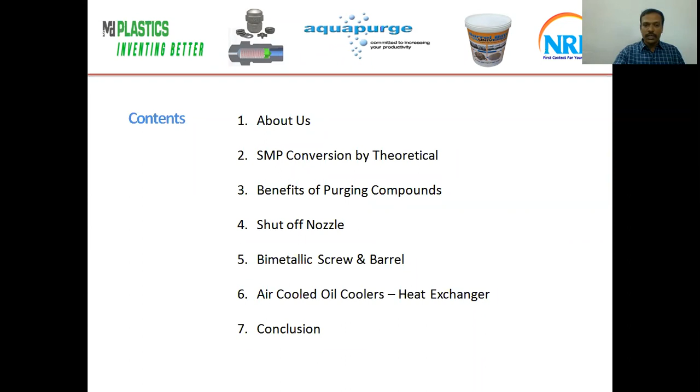I'm going to brief about cost saving by increasing equipment efficiency and reducing the cost of produce through enhancement of production via process optimization. I'll cover the contents like SMP conversion by theoretical, benefits of purging compound, shut off nozzle, bimetallic screw and barrel, air cooled oil coolers, and conclusions.

Aquapurge, Karthik, your screen is not shared. Go to your share screen. Share. Okay, screen, sir. No, now it is okay. Screen is not coming. Oh yeah, let me. The screen is shared because I am. Yes sir, it's shared. Yes sir, visible. Yeah, then proceed.

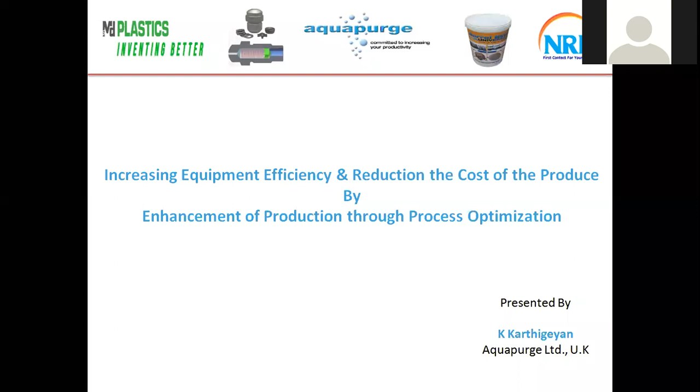Via export-led sales drive, Aquapurge has more than 750 customers worldwide, and now is introduced into India for enhancement of business. NRH Industrial and Auto Machineries is the distributor of Aquapurge in India, located at Chennai, Tamil Nadu.

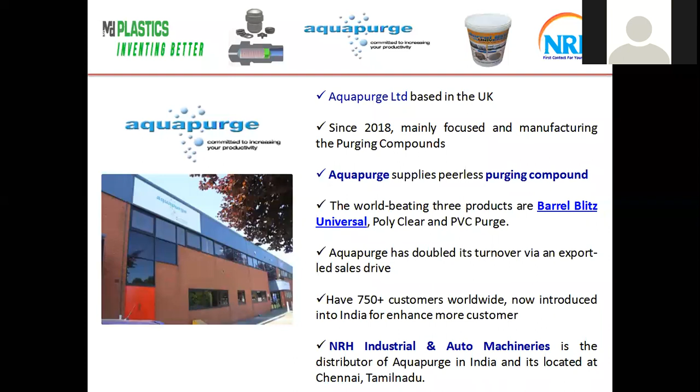By implementing SMP conversion in the plastic industry, it helps save cost. What is SMP? SMP means standard molding parameters. Any kind of plastic part before production, a trial has to be conducted and the process optimized and validated. Once the process is optimized and validated during trial, the parameters are recorded. The recorded parameters are normally called standard molding parameters.

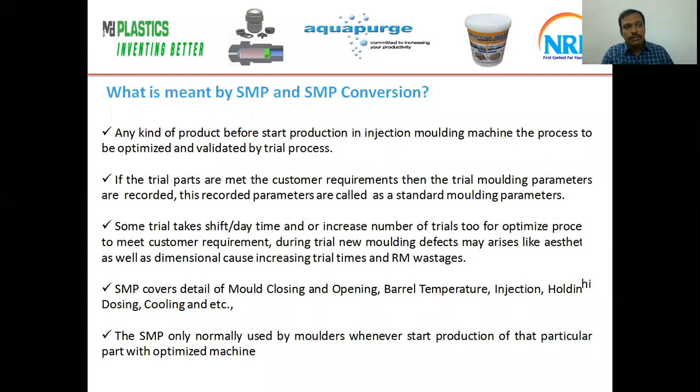Normally the trials take a shift or daytime, and sometimes the number of trials also increases to meet customer desired quality. SMP covers details of mold closing, opening, barrel temperature, injection, holding and dosing, cooling, etc. parameters. The SMP is normally used by molders whenever they start production on the injection molding machines.

SMP conversion means any product which is previously molded in an injection molding machine meeting customer requirements, the particular SMP can be converted to our desired machine theoretically to save trial time, raw material wastage, and also cost of the produce.

For example, the beaker part running in a 100-ton machine has an SMP available. Now we plan to take a trial in a 150-ton machine for future production. So the 100-ton machine SMP we can convert theoretically to match the 150-ton machine. This SMP converted parameter we can use as the basic parameters before starting the trials.

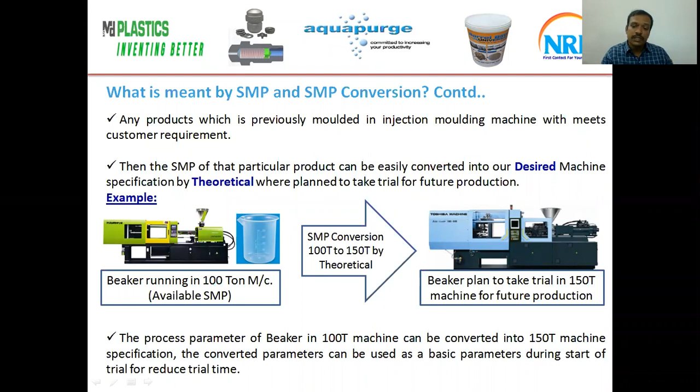Why is it important? These techniques increase the success rate of trial while meeting customer requirements. Whether this part can be molded in that particular machine or not, we can find out before the trial. We can save trial time, reduce material wastage, and also prevent molding defects.

Especially, sometimes the parts are filled using a sequence gate to avoid weld lines. Without conversion, the weld line may shift to some other place. By using conversion, in the same area we can follow the weld line sinks and short fills, enabling easy startup and process fine tuning.

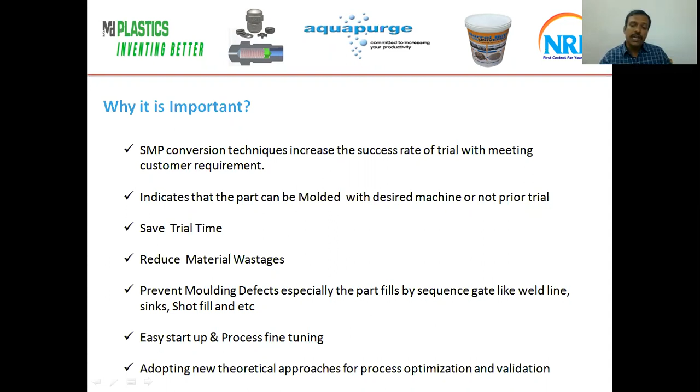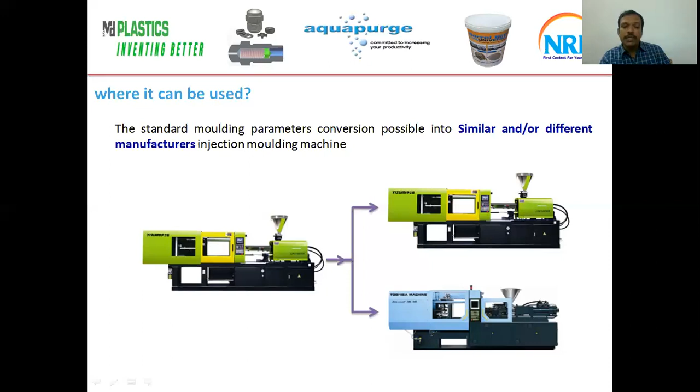This SMP conversion also helps adopt new theoretical approaches for process optimization and validation in the injection molding process. Where can it be used? This process conversion can be used on similar injection molding machines and different make injection molding machines. If I have a 100-ton Usumi machine, and have planned to load in a Toshiba 150, the process can be converted from Usumi to Toshiba, or Toshiba to Usumi.

When can it be used? Sometimes the machine may get a breakdown, and at that time we want to produce this particular part, then we want to take a trial. This SMP conversion helps in that situation.

This SMP conversion helps to load this particular mold in other machines with an easy fine-tuning process. It also serves as a contingency plan for plastic industries.

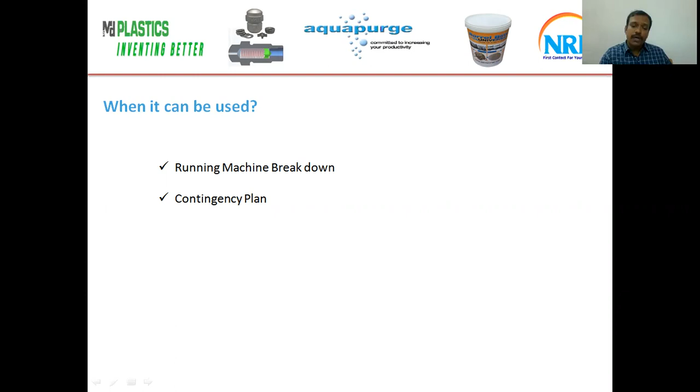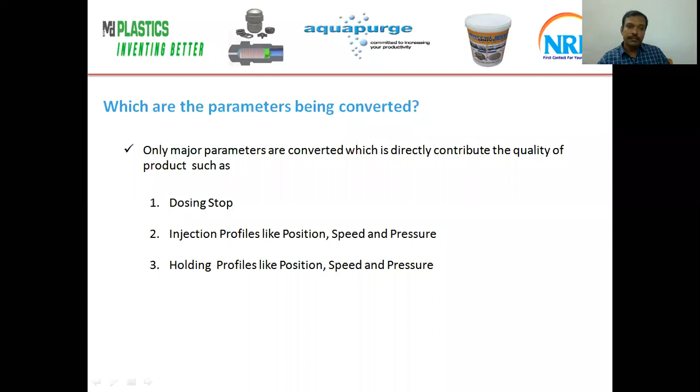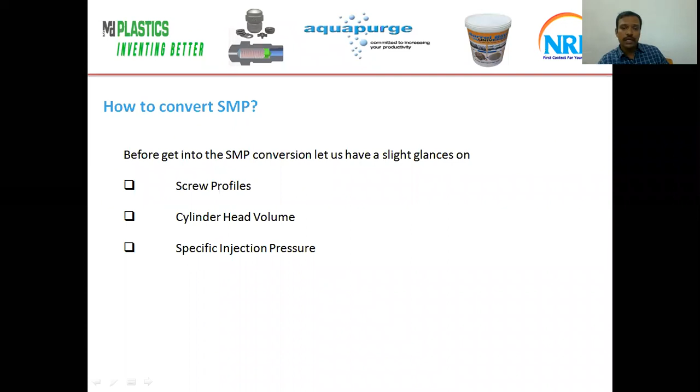So how to convert SMP? Before we get into the SMP conversion, let me give some glance on screw profiles, cylinder head volumes, and specific injection pressures. In industry, normally some molders carry out production in injection molding unknowingly of the screw profile details in the injection molding machine.

Normally, knowing the screw profile before trial or production in injection molding helps molders improve process consistency and makes it easy to troubleshoot molding defects such as discoloration, black spots, and degradation on molding.

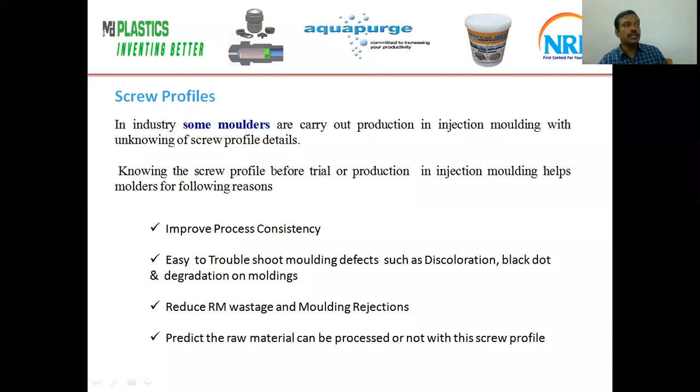If you mold raw material with master batch using a standard profile screw, it normally causes discoloration. So you need a barrier screw instead. This reduces raw material wastage and molding rejection, and helps predict whether the raw material can be processed or not with the screw profile in the injection molding machine.

Here the schematic diagram shows the standard profile screw. Normally, a standard profile screw has a lower shear rate, while a barrier profile screw has multiple flights on the screw and a medium shear rate for processing plastic material.

It will support good mixing when molding raw material with the master batch. A mixing profile screw gives a higher shear rate of processing material, but it supports very good mixing of raw material with the master batch.

If you process raw material with master batch using a standard screw, it normally causes improper mixing since it's a standard profile screw, so discoloration issues may appear. So it is preferred and suggested to process with a barrier or mixing profile screw to prevent such discoloration molding issues.

If you process any engineering material with a mixing profile screw, it causes a higher shear rate, and the molding defect of burn marks may appear on the molded parts. So, screw profile also plays a vital role in injection molding machines for molding free from defects.

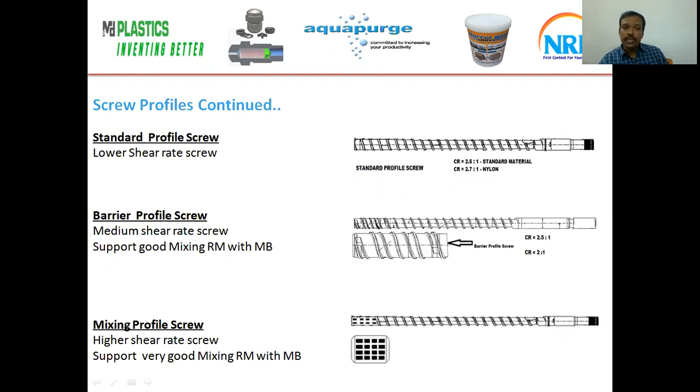Calculation of cylinder head volume: normally the maximum screw stroke in an injection molding machine would be 4 to 5 times the screw diameter. If the screw diameter is 50 mm, then the screw stroke might be 4 into 50 equals 200 mm, so 200 to 250 mm.

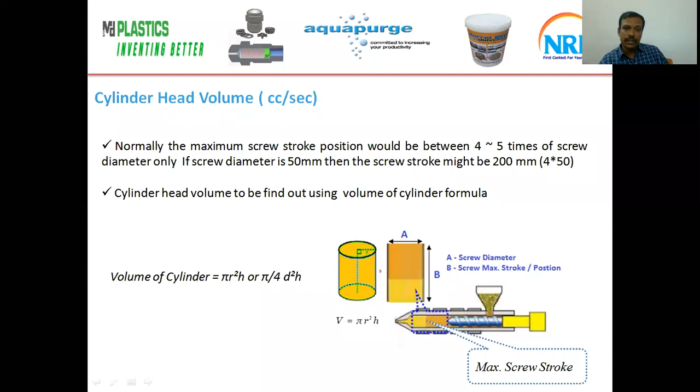Cylinder head volume can be found using the volume of cylinder formula, pi r square h or pi by 4 d square h. Let us assume the screw stroke is 4 times the screw diameter to calculate cylinder head volume: 4 into 50 equals 200 mm or 20 centimeters.

Second, we have to find the screw radius. Screw radius equals screw diameter by 2, so here screw diameter 50 by 2 equals 25 mm or 2.5 centimeters. After finding the screw stroke and radius, we can finally find the cylinder head volume.

So volume of cylinder equals pi r square h. Cylinder head volume equals 3.14 into 2.5 into 2.5 into 20. So for a 50 diameter screw, the cylinder head volume is almost 392.5 cubic centimeters.

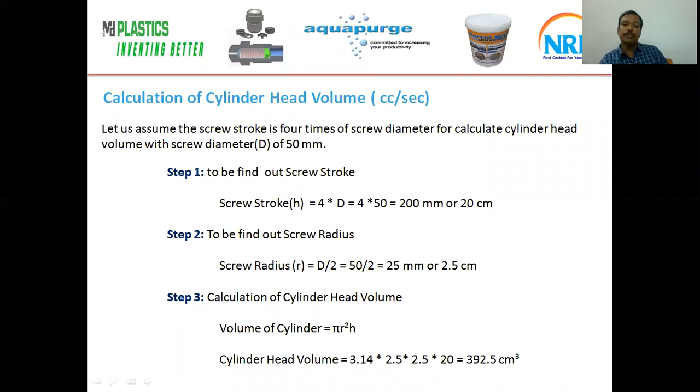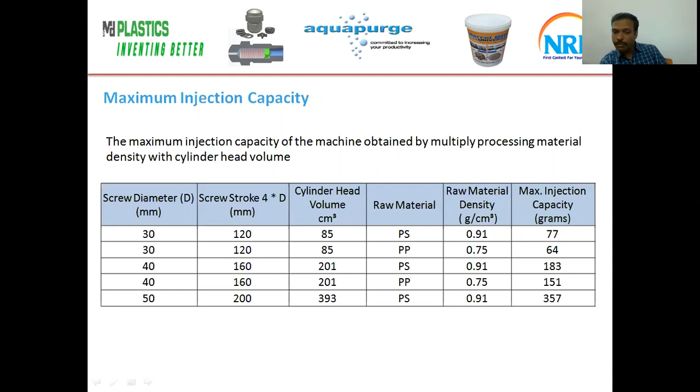Specific injection pressure.

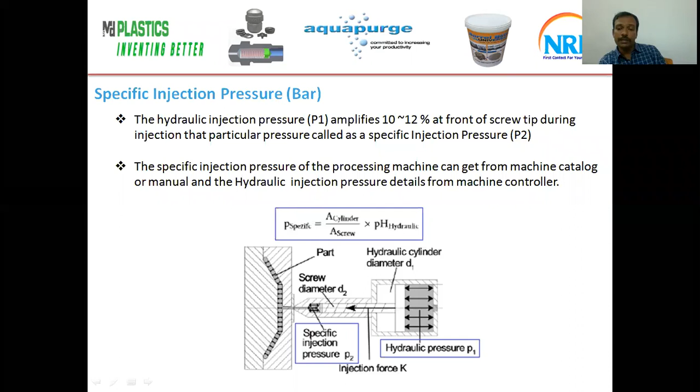Dosing stop position calculation. The dosing stop position is also found out by using the volume of cylinder formula. So dosing stop position equals shot weight divided by pi r square into 0.1 into density of material. Here that 0.1 refers to 1 mm stroke.

I have already run this beaker part in a 100 ton machine. The 100 ton machine has a screw diameter of 50 mm. So the dosing stop is 68 mm.

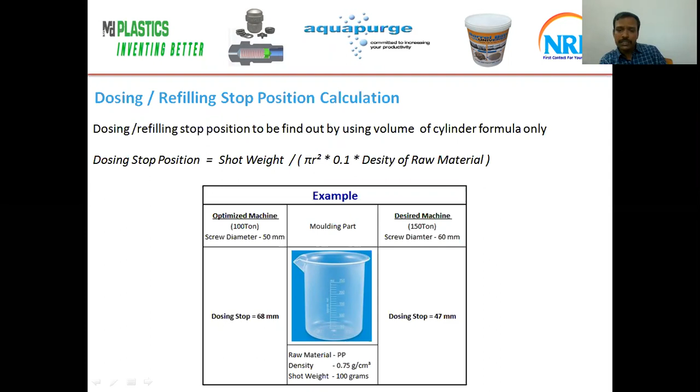Now I am planning to run this part into the 150 ton machine, which has a screw diameter of 60 mm. So by using this calculation, the dosing stop comes to 47 mm. So when screw diameter increases, the screw stroke might reduce.

Injection position and stroke profile conversions. The injection profile is converted using the same volume of cylinder formula like dosing stop. For the 100 ton machine, specific injection pressure is 2000 bar and hydraulic pressure is 190 bar. So in SMP we have that injection profile.

The positions are 70, 50, 18; speed 25, 80, 45; and pressure 100, 100, 100. Now I am going to convert this profile into the next desired machine of 150 ton. First I am going to convert the stroke positions.

Injection stage wise stroke is first converted into weight. First stage 20 mm injected, second stage 32 mm injected, third stage 8 mm injected. That 20 mm is converted into the weight such as 29.4, 47.1, 11.8, with the screw diameter of 50 mm.

Then the weight is converted into the position to suit screw diameter of 60 mm. Stage 1, 14 mm we have to inject; stage 2, 22 mm we have to inject; stage 3, 6 mm we have to inject.

Our screw dosing stop is already calculated, that is 47 mm. Then stage 1: 47 to 14 is 33 mm. So stage 1 we are injecting 14 mm. So stage 2: 33 to 22 is 11 mm we are injecting in the 60 dia screw. Then 11 to 6, 5 mm is the switchover position in the 150 ton machine.

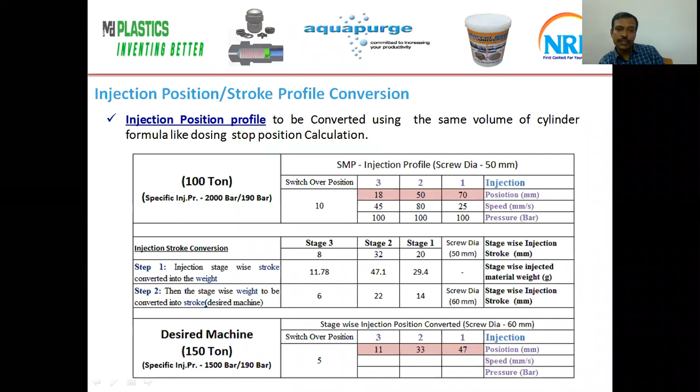So here's a question: what could be the injection rate if the injection speed is 50 mm with the screw diameter of 50 mm? First step, we have to find out the area of the screw. So the area of the screw for 50 mm dia is 19.625 centimeter square.

Step 2, we have to find out the injection rate. Injection rate equals injection speed by 10 mm - I am converting into centimeter, that's why I divided by 10. So 5 centimeter multiplied with the screw area of 19.625 centimeter square. So we obtain the injection rate of 98 cc per second.

So injection rate of 98.

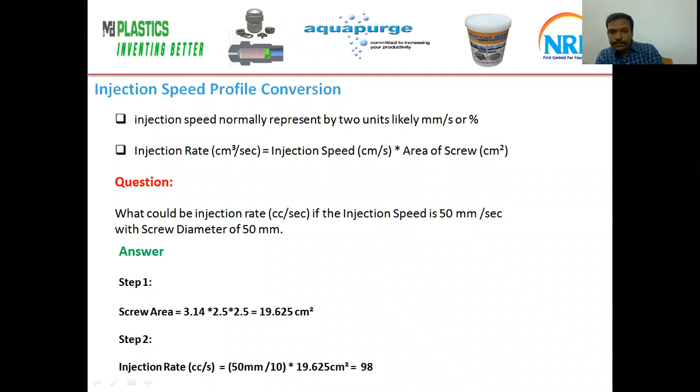Next, injection speed profile conversion. Now we know how to convert injection speed into injection rate. The same way we have to follow here. First step, the injection speed of the 100 ton machine is converted into the injection rate, such as first stage 49 cc per second.

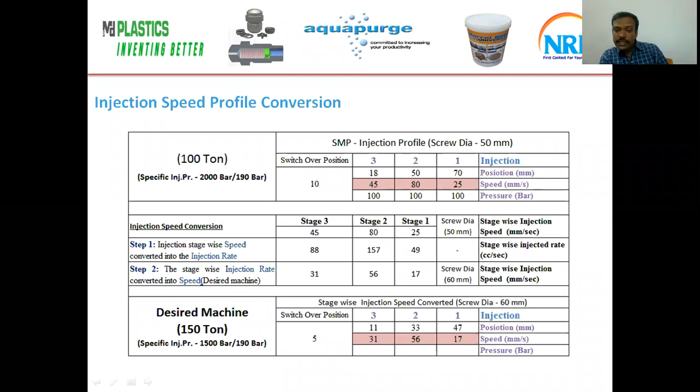Second stage, for 80 mm per second speed, it's 157 cc per second; third stage, 88 cc per second. Finally, the injection rate is converted back into the speed of the desired machine by using the screw diameter. So the speeds obtained are: first stage 17, second stage 56, third stage 31 mm per second.

Next, injection pressure conversions. We have to obtain the specific injection pressure and hydraulic pressure details from the catalog and the machine controllers. First step, hydraulic pressure is converted to the specific pressure. Second step, that specific injection pressure is converted into the hydraulic pressure of the desired machine.

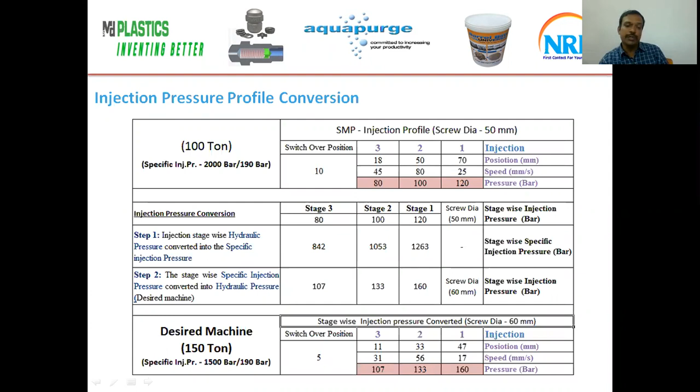So in the 50 dia machine, 120, 100, 80 is the injection pressure. For 60 dia, 160, 133, 107 is the injection pressure, because the 150 ton machine has a maximum specific injection pressure of 1500 bar. The holding pressure, speed and pressure profile conversion is the same as how we converted the injection pressure - the same method we have to follow here also.

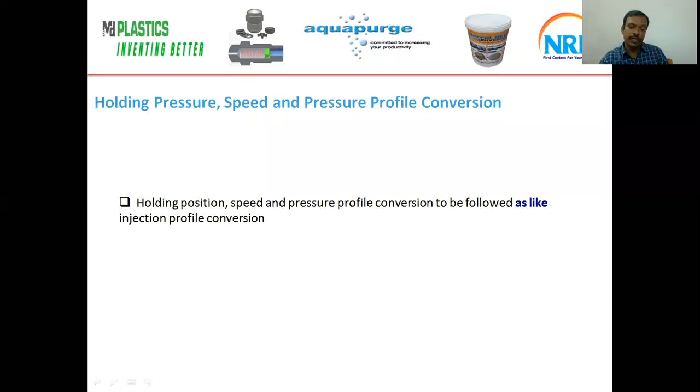After conversion, this process parameter requires some amount of process fine-tuning because of differences in screw diameter, screw profile, L/D ratio and compression ratio, changes in residence time due to screw diameter, wear and tear of screw and barrel, differences in nozzle orifice, and different manufacturers' injection molding machines.

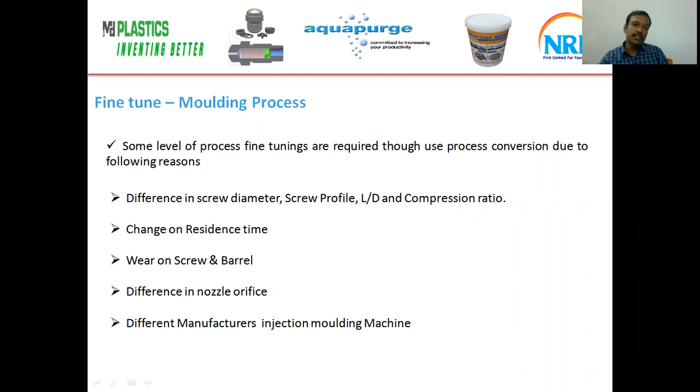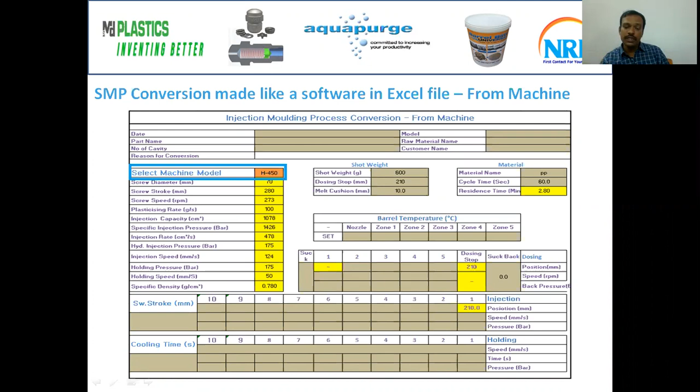In my previous company, I worked out a software in Excel file. Normally I select the machine, and automatically the specification comes out. So I feed the basic parameters, then select which machine I am going to take the trial on, and that process parameter is automatically converted into the two machines.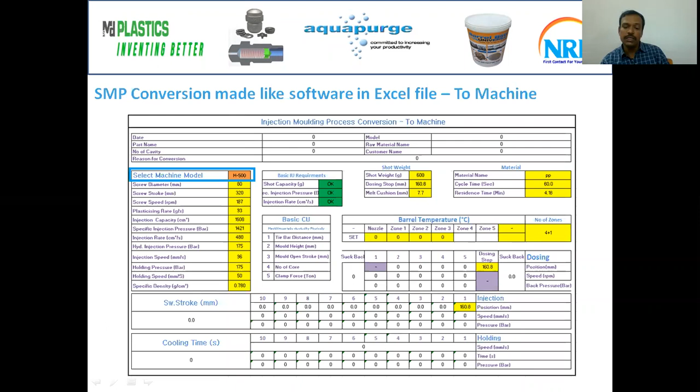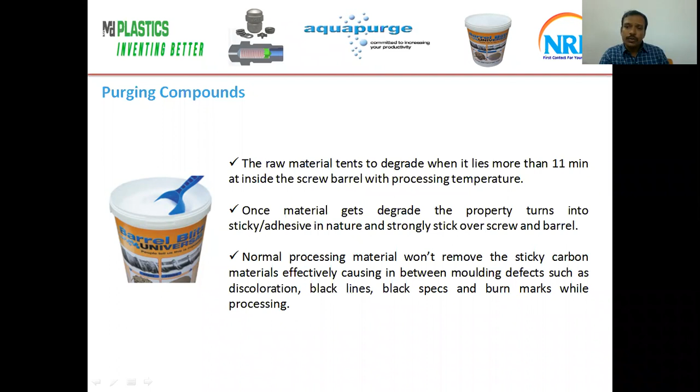Next, I am going to talk about the benefits of purging compound. Normally, any plastic material tends to degrade if it stays more than 11 minutes inside the screw barrel at processing temperature. Once material degrades, it becomes sticky or adhesive in nature. Once it sticks on the screw and barrel, it's very difficult to remove. Normal processing materials won't remove the carbon effectively, so it causes black dots or black lines during molding.

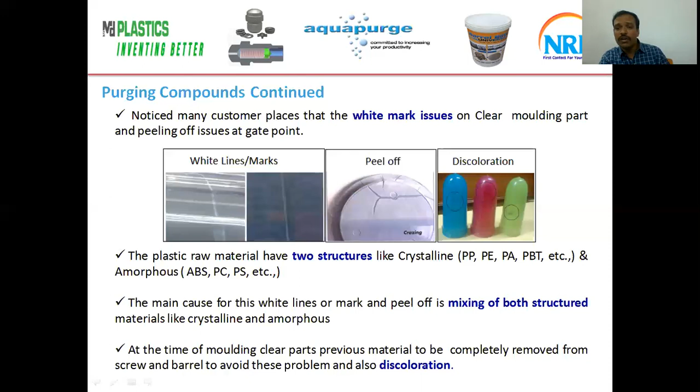At some customer places, I noticed white lines, peel off, and discoloration issues. These are caused by mixing of two structured materials, such as crystalline and amorphous. To eliminate these defects, we have to completely remove the last processing material. For example, if you change from PP to PC, PP is a crystalline structured material and PC is amorphous, so the crystalline material must be completely removed from the barrel and screw prior to starting PC molding. Otherwise, it will cause white lines, peel off, and similar issues.

So I'm going to introduce Barrel Blitz Universal. It works like a scrubber, removes sticky carbon material, and effectively cleans the last processing material from the screw and barrel. BBU enables rapid material and color changes too.

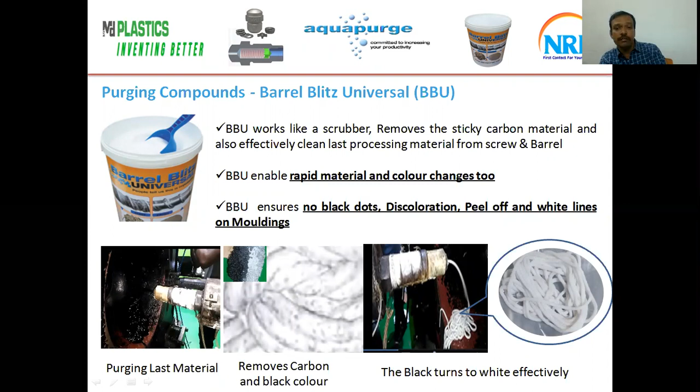BBU ensures no more black dots, discoloration, peel off, and white lines as molding defects. Here I've shown some photographs of purging the last material, removing carbon black material, and turning it to white effectively within 40 minutes.

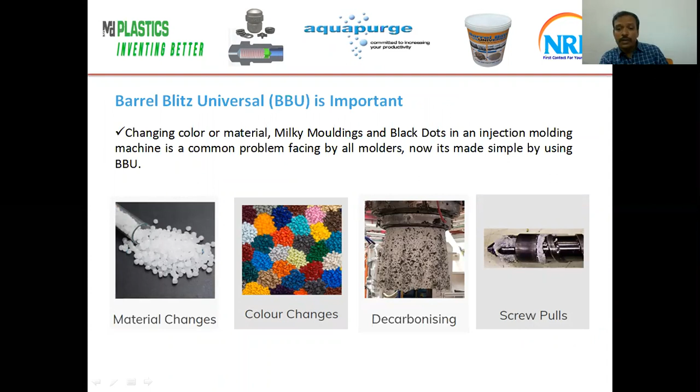The purging material can be used when changing material, changing color, decarbonizing, removing carbons from molding, and removing the screw from the barrel. Purging compounds like BBU can be used in injection molding, extrusion, and blow molding as well.

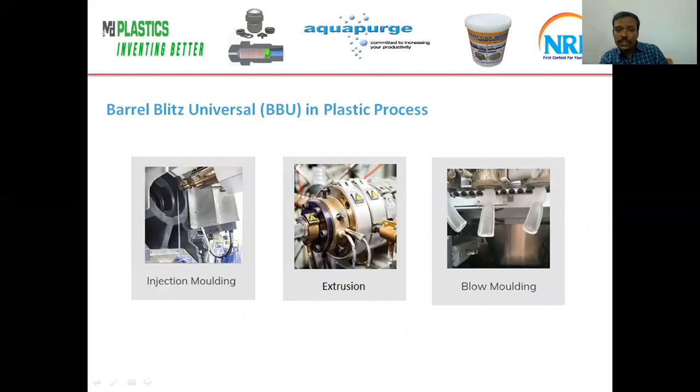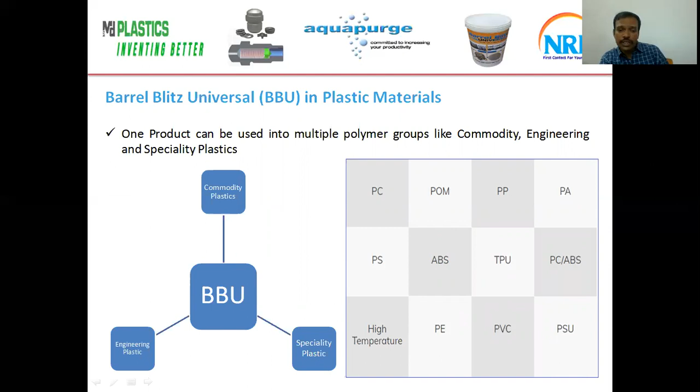Barrel Blitz is a universal grade that can be used with all commodity, engineering, and specialty plastic materials. It suits all kinds of applications and moldings, such as automotive, home appliances, textile, preforms, medical, packaging, PVC pipes, and household applications. Normally, customer requirements are quality, reliability, and lower processing cost.

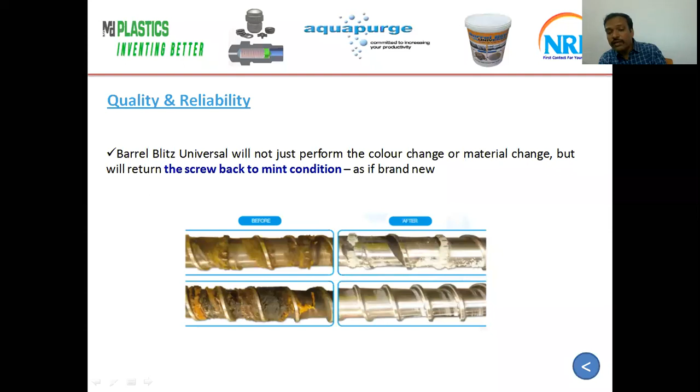Barrel Blitz doesn't just perform color or material changes—it turns the machine back to original conditions, as when we purchased the machine.

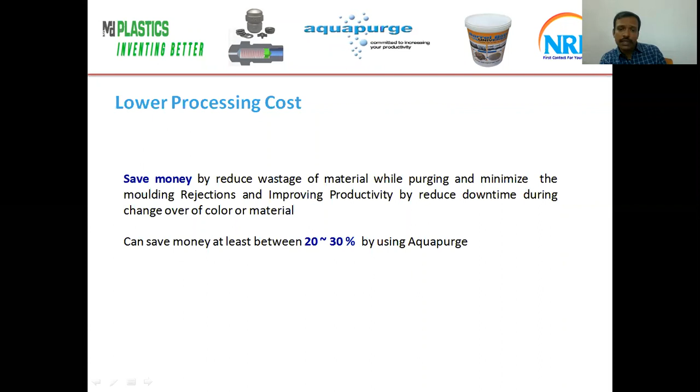By using purging compounds for color or material change, customers save money and improve productivity and profitability in the plastics industry. Normally it saves at least 20 to 30% of cost by using purging compounds.

Next, I am going to talk about shut-off nozzles. A common practice to avoid stringing and drooling in moldings is increasing suckback to prevent these issues.

But in scientific molding approaches, we should not use suckback for drooling or stringing because it will destabilize the molding and make the drooling and suckback process worse. So normally we have to use a shut-off nozzle to prevent stringing and drooling in moldings.

By using a shut-off nozzle, we can prevent streaks, voids, bubbles, and short fills in moldings. It also helps process consistency and repeatability.

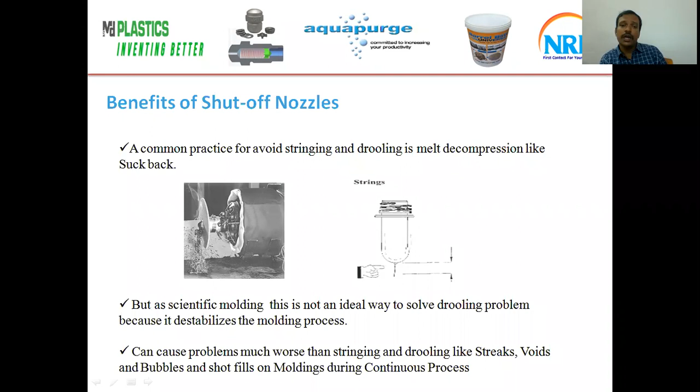So shutoff nozzles from MD Plastic USA. The shutoff nozzle tip is the simple and cost-effective solution to prevent drooling and stringing. It shuts off immediately as soon as the injection and holding process gets completed.

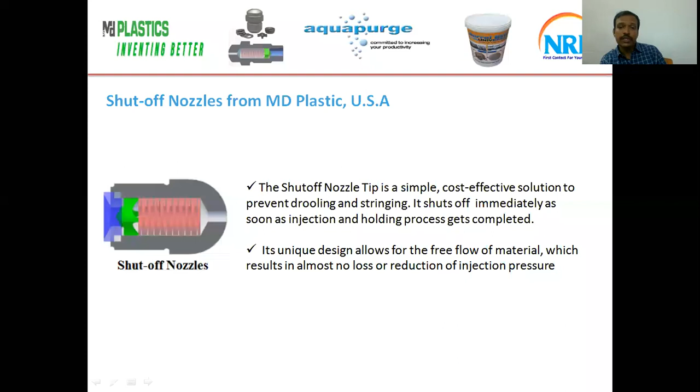Its unique design allows material to flow freely into the mold and also results in no loss or reduction of injection pressures. Features: reliable, easy to use, easy to install and remove, fits all nozzle bodies, used with all machine sizes, used with all polymers, and also easily available in stock.

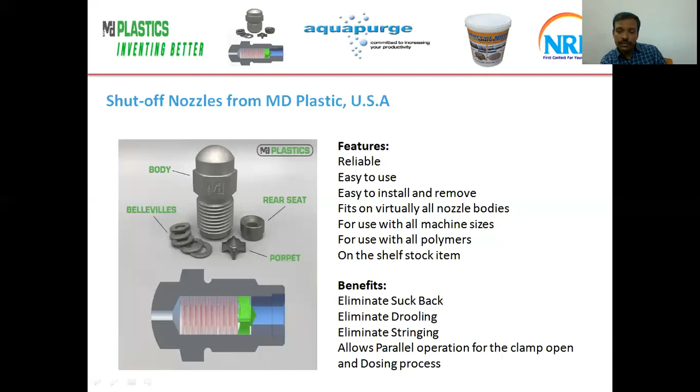So benefits for the shutoff nozzle: eliminates suckback parameters, eliminates drooling and stringing, sometimes allows parallel operation of mold open with the dosing process to reduce cycle times.

Next, I am going to talk about bimetallic screw barrel. Bimetallic screw barrel is made up of two metals. One is the base material such as nitro alloy, and one more is alloy liners like tungsten carbide.

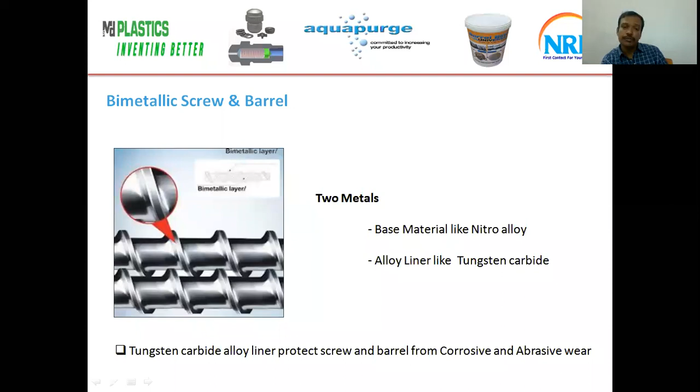When we process FR and glass-filled materials with a normal nitride screw, it causes abrasive and corrosive wear. So to prevent the screw and barrel from abrasive and corrosive wear, we have to use bimetallic screw and barrels.

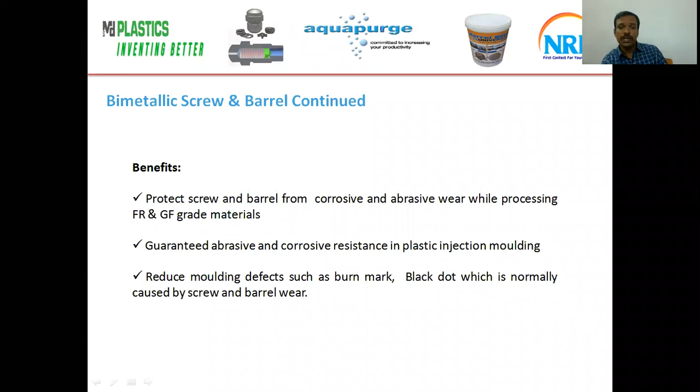By processing glass-filled and FR grade material with bimetallic screw barrel, we improve the life of the screw and barrels, and reduce molding defects such as burn marks and black dots, which are normally caused by screw and barrel wear.

Next, I am going to talk about air-cooled oil coolers. Normally, injection molding machines are powered and driven by power units. The hydraulic oil flows inside the cylinders and valves, which causes restriction of oil, increasing the oil temperature.

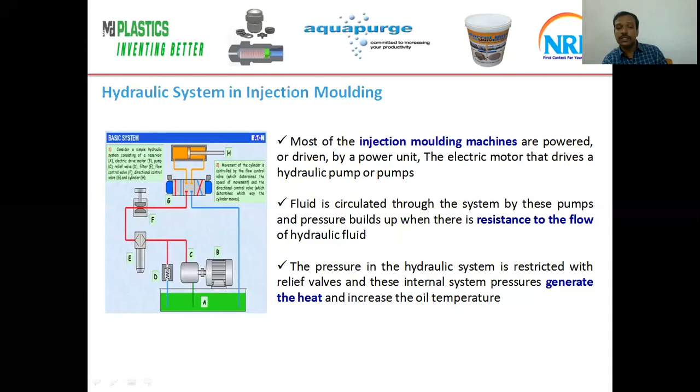When oil temperature increases, the viscosity of oil might change. When oil viscosity changes, it affects the system performance and also the elements of the system. Normally in the injection molding machine, we have to operate the oil temperature between 40 to 50 degrees. If it increases or decreases, the performance of the machine would change.

Normally in industry, heat exchangers are used for cooling the oil. From the restriction, the oil gets heated. That heated oil is cooled down through water circulation in the heat exchangers. Normally by using water, sometimes it causes scale formation in the heat exchanger, also affecting the performance of cooling the oil.

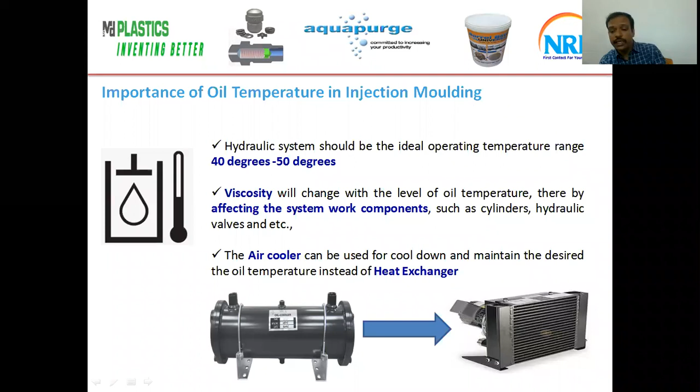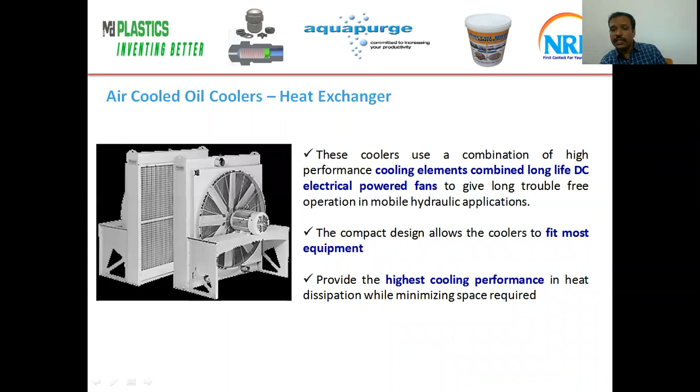Now, newly introduced are air coolers to cool down the oil temperature instead of heat exchangers. These coolers use a combination of high performance cooling elements combined with DC electric motors. They fit most equipment, use highest performance in heat dissipation while minimizing space required.

So air coolers are more suitable when water is scarce and contaminated. No water is required for cooling hydraulic oils, and this can save water too. No issue of scaling in the injection molding. It cuts down water circulation in the heat exchanger, and helps improve water pressure in main lines. It indirectly supports mold cooling for reduction of cycle times.

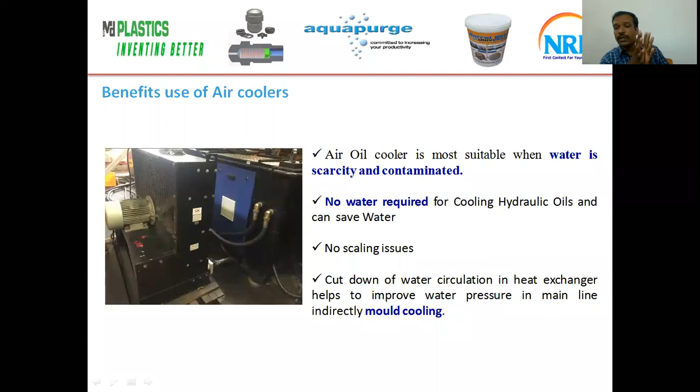Conclusion: SMP conversion can contribute to saving trial time and reducing raw material wastage during trials, to save cost of production. Aquapurge is the mechanical purging compound that provides deep clean of screw and barrel, enables rapid cleaning and color change, and effectively removes carbon.

Use shutoff nozzle to prevent drooling and stringing, and also stabilize the molding process for consistency. Bimetallic screw and barrel protects from abrasive and corrosive wear while processing FR and glass-filled materials. Air oil cooler is the most suitable cooling method for oil in injection molding machines instead of heat exchangers, when water is scarce and contaminated.

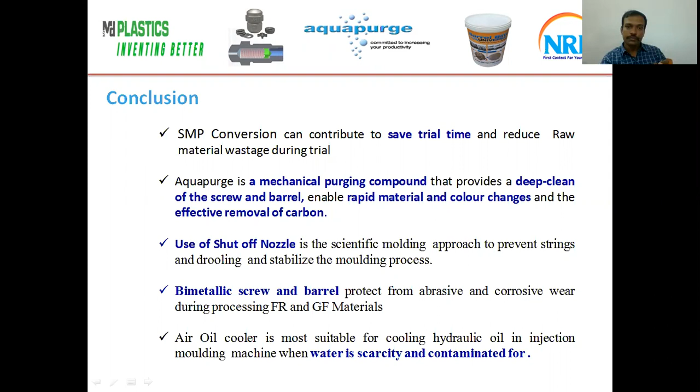Thank you. Thank you. Yeah.

Thank you, Karthik, for your very good presentation. Using one component held in one machine, like a 200 ton machine, for emergency shifting of this mold from 200 ton, 250 ton, or 150 ton, the same parameters can be converted to the new machine, which can reduce cycle setting time, especially product cycle time can be changed. So it's a really good new concept.

It can be introduced in companies' molding facilities for reducing their changeover times. You have given very good details about the usage of purging compounds and shutoff nozzles, how it improves the quality of the product and reduces rejections. Also, the heat exchangers and air heat exchangers, how they reduce water and water contamination, and also improve mold quality and other things. It's a good presentation.